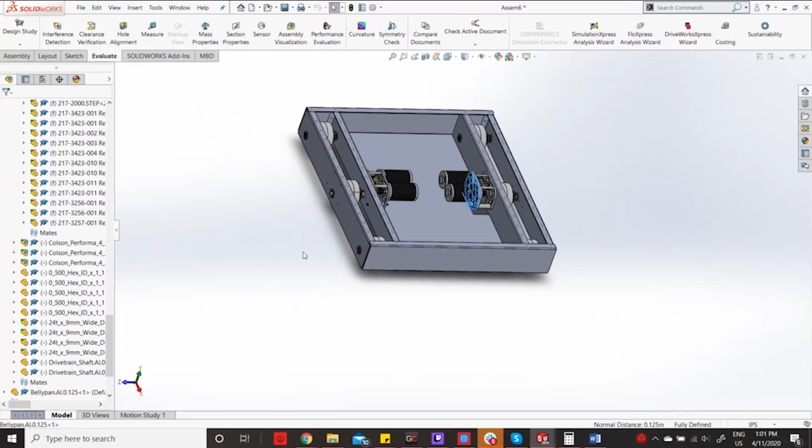Good. Yeah, that's like a basic 2018 drivetrain.

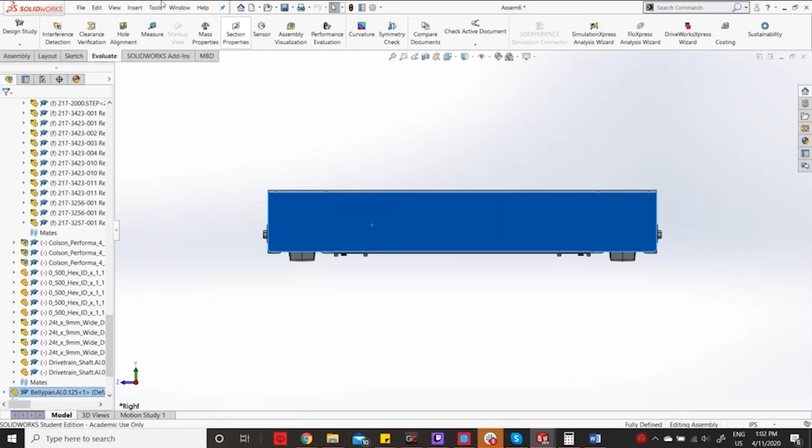So let's just go ahead and pop the holes in. Edit part. File, save as, assembly, drivetrain.

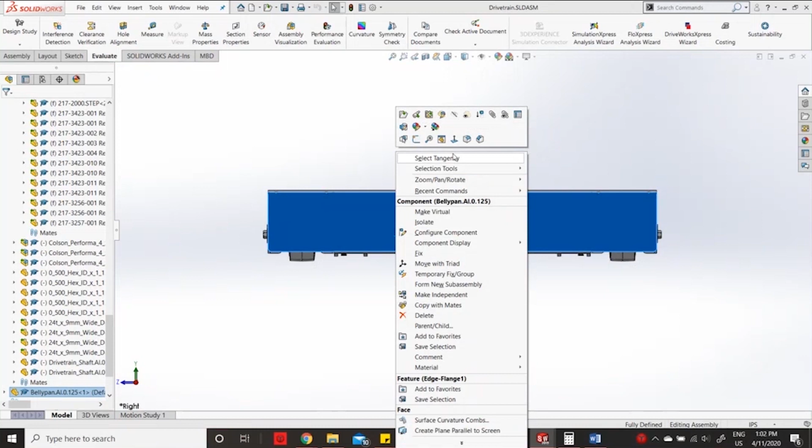So let's see. Part. Okay, so we're gonna want to sketch. This is the fun part of all of this, doing sketches on top of things. Does it not create a sketch? Okay, there we go.

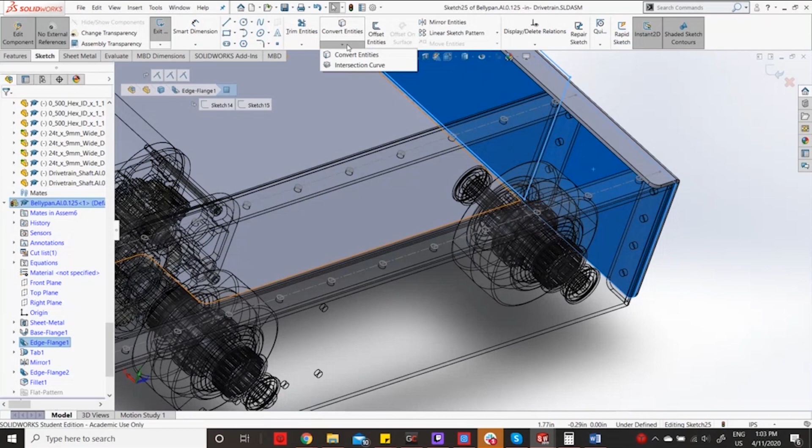Because there's one thing that SolidWorks doesn't have that I really do enjoy from Inventor, which is the ability to project from one element to another.

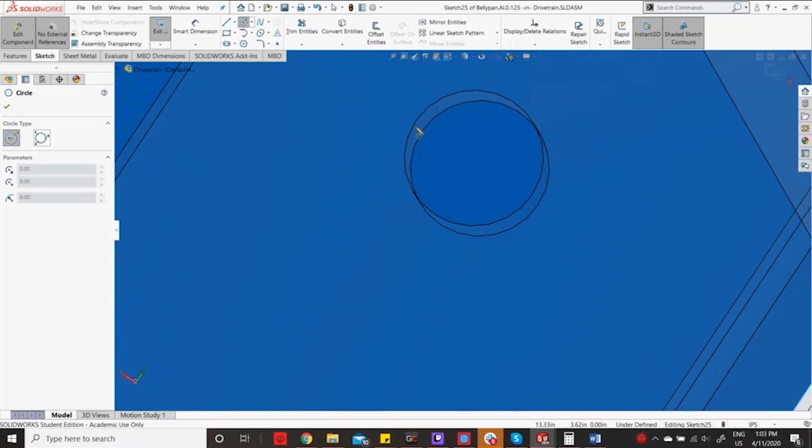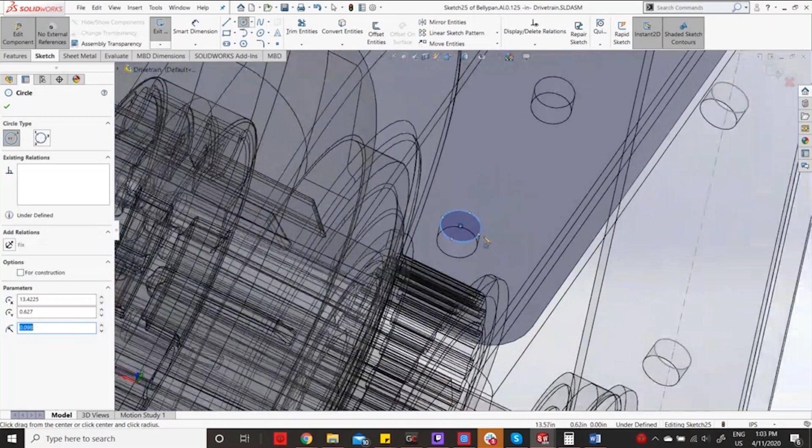So then you're stuck playing this game of trying to find it. So then from that, I can just go out and make all my changes in the belly pan.

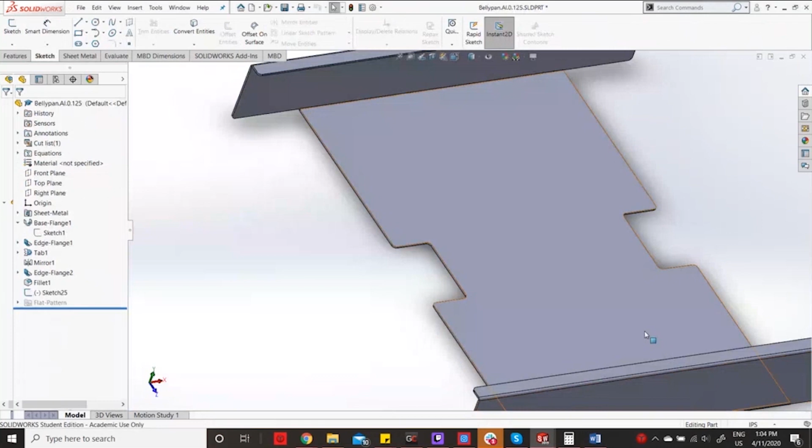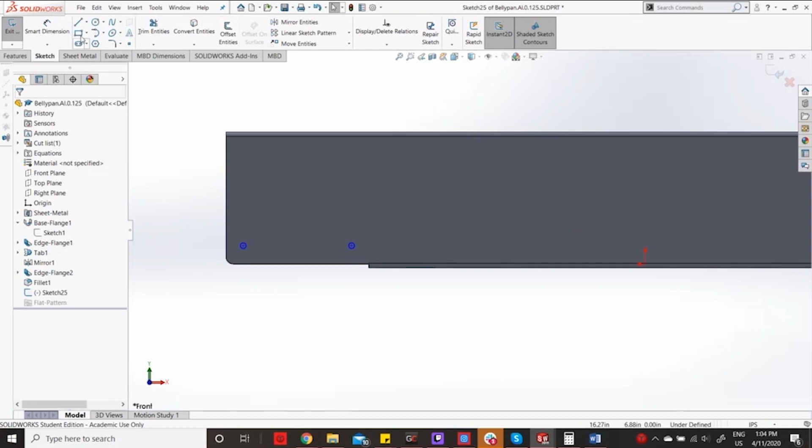So let's go back into the sketch. Okay, and then we know for sure that this is a linear sketch pattern going upwards.

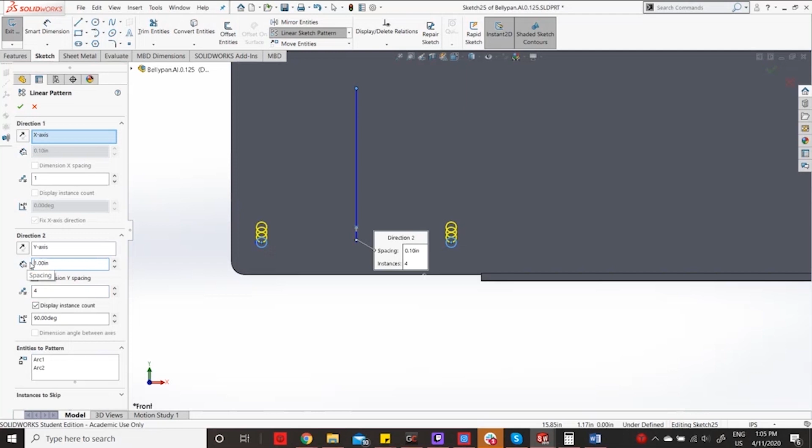We can decrease this to 0, increase 1 here, increase this to 4, increase this to 1 inch, and that should be perfect.

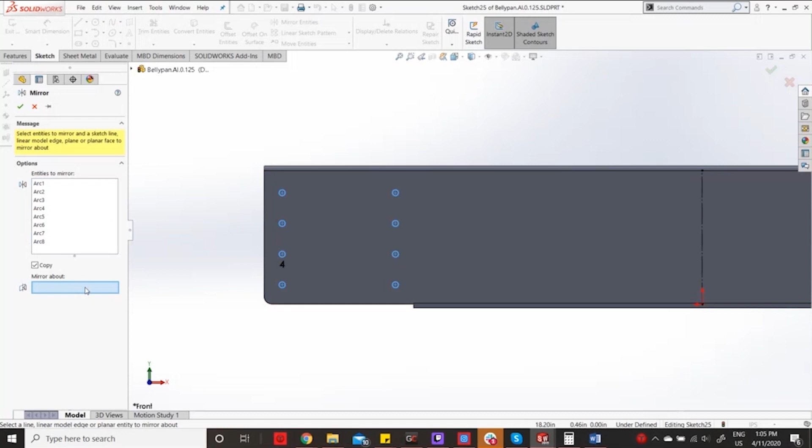And then we should be able to just go ahead and mirror this. Construction geometry, and then mirror entities, mirror those across here, and then exit features, extrude cut.

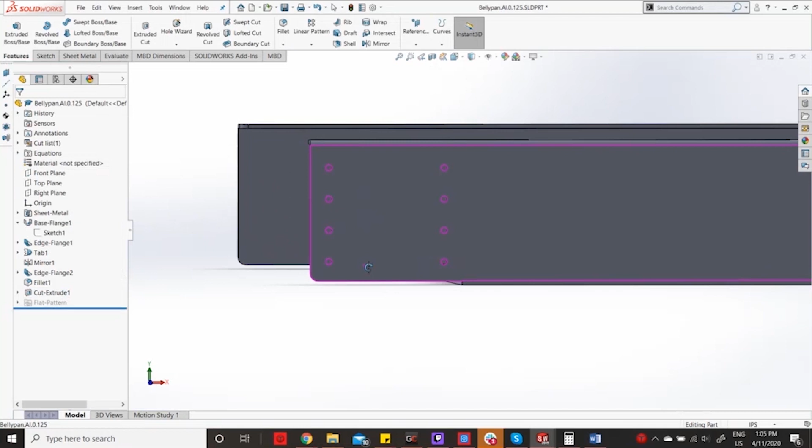Through all. And did it not through all? Did feature through all both. There we go.

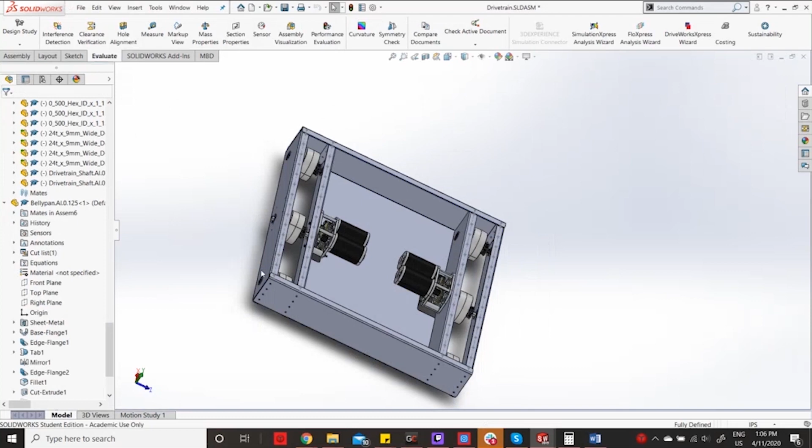Perfect. Okay, and then let's control save that, and let's check if it lines up. Yep, seems to line up. They all line up.

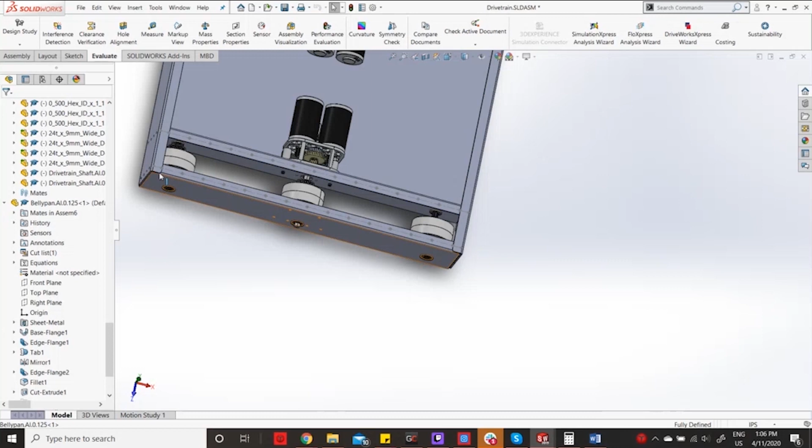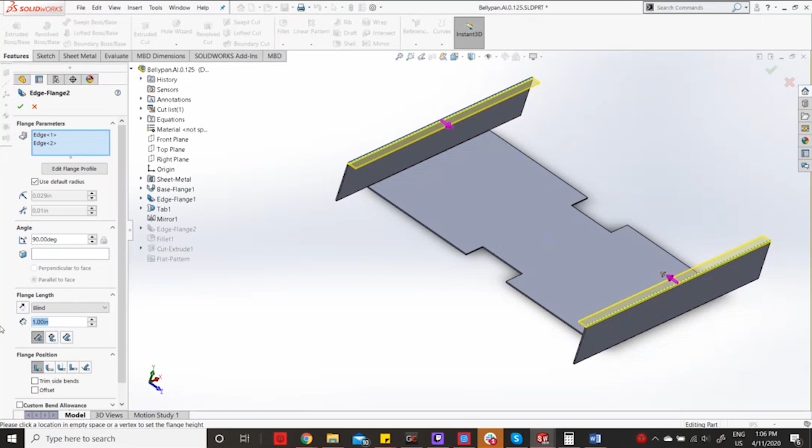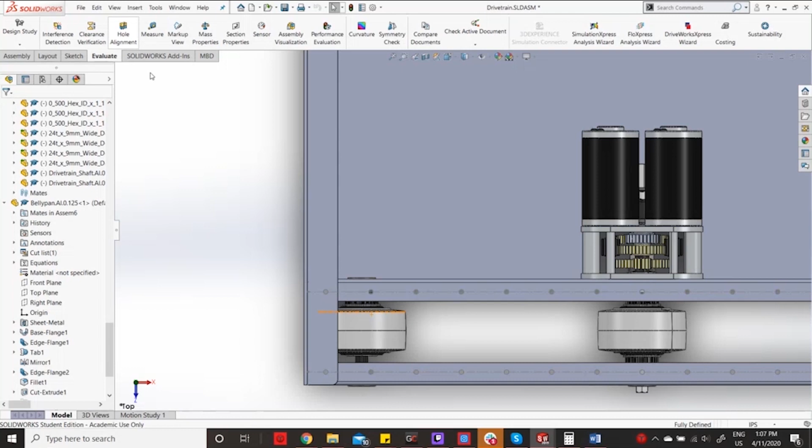Okay, perfect. And then let's throw in a part. Then let's start a sketch here. And then let's make these holes.

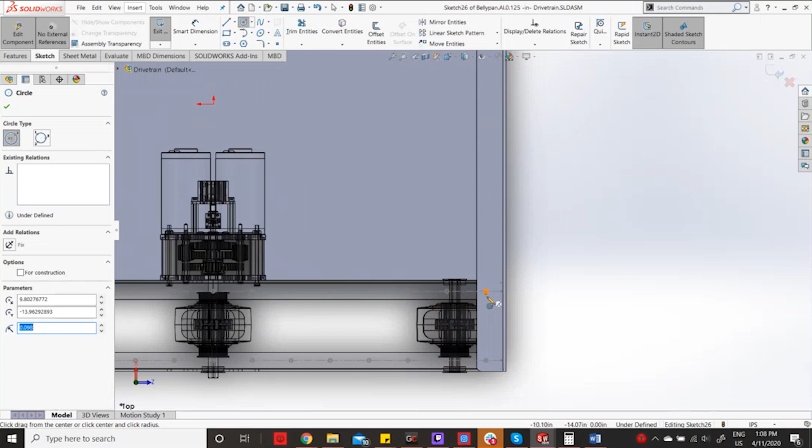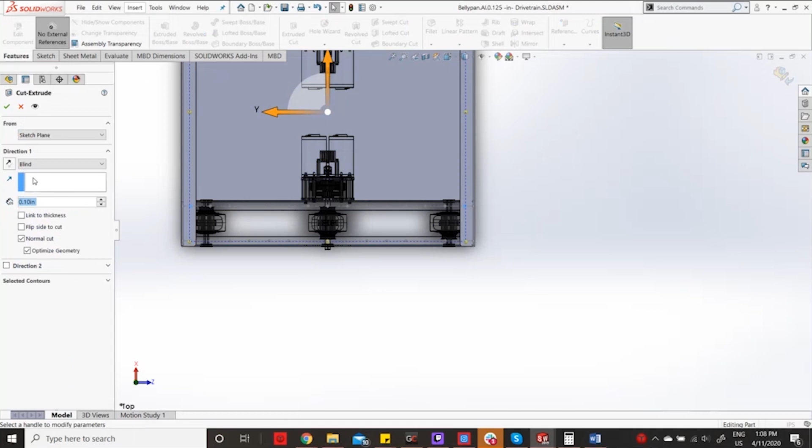Another way I could have done this is I could have just done the bottom two and then linear pattern it all around into the four. Features, extrude cut, through all.

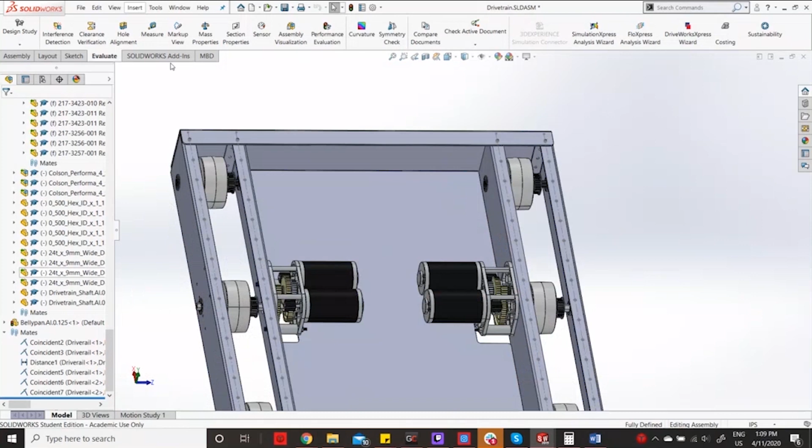Perfect. And then I'm just going to make one last piece and this drivetrain is done. Which is our, how long was the distance between? 4.525. So file, new part.

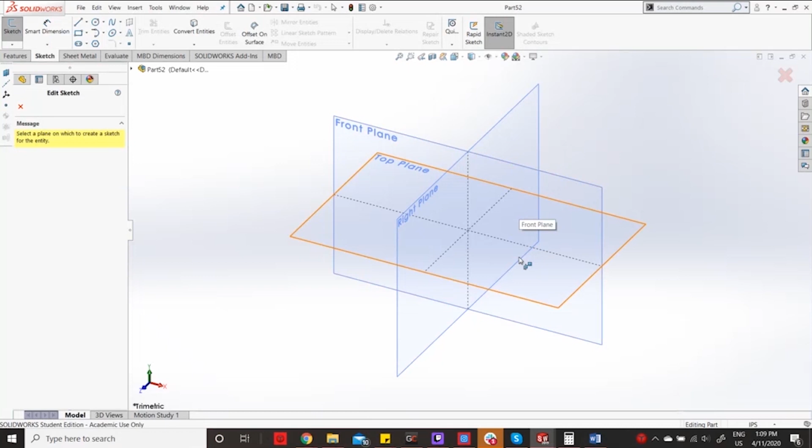A sketch, plane. These are going to be the braces for the drive rail. So let's make them 4.525, and we can make them 3 inches. That looks fine.

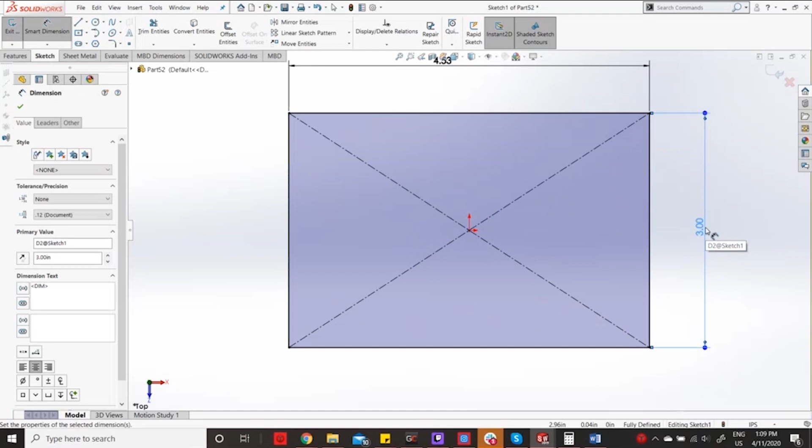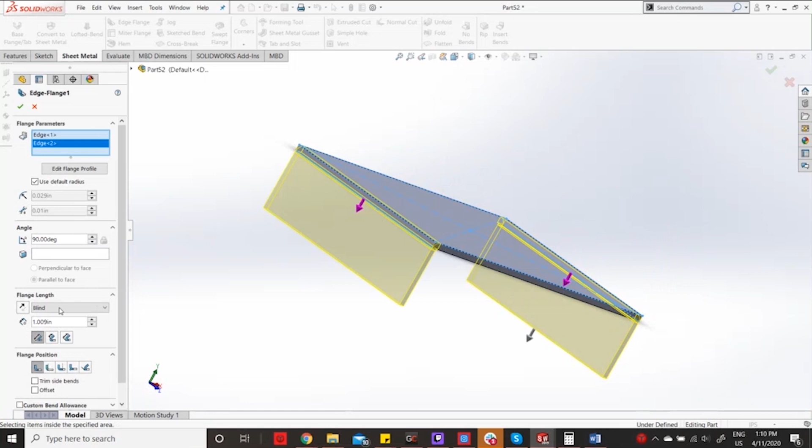Sheet metal. This can be 90 thousandths. This does not need to be overkill. And then edge flange, they can be an inch. And don't forget your flanges - alright, your fillets, I mean.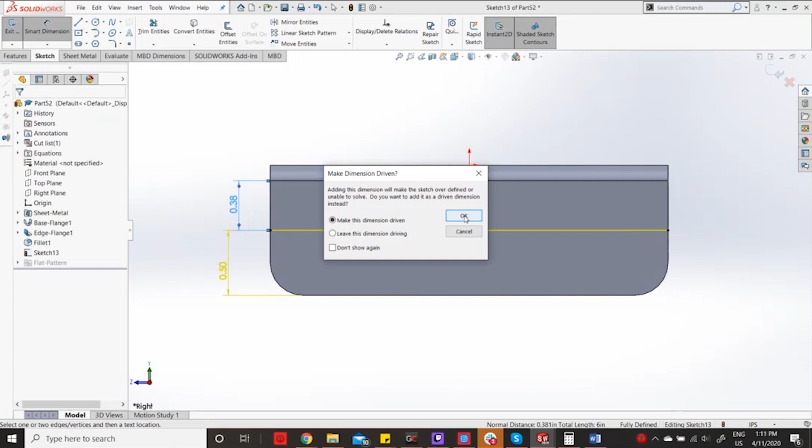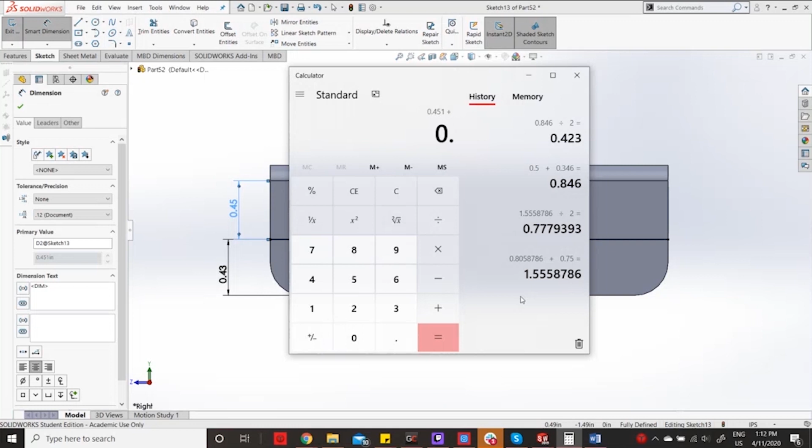0.5. Okay, and that should be the center. It's 0.43, I think it is. 0.451 plus 0.43 divide by 2. Okay. 0.4405.

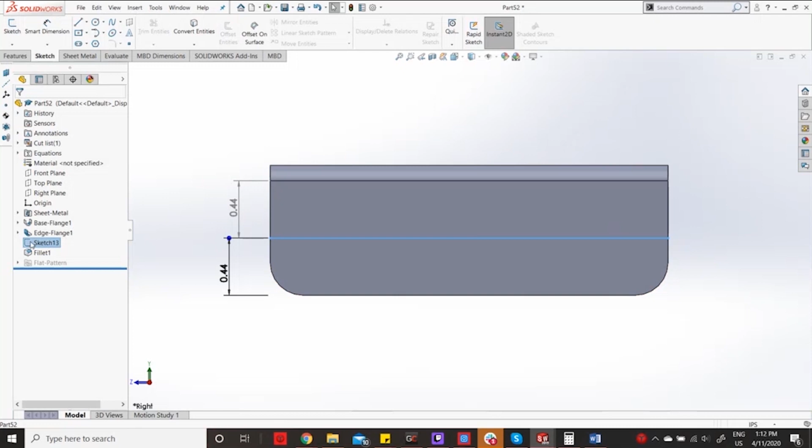You know what? Let's do it this way. Can I actually put this up above here now? Yeah, okay. Let's delete this, let's delete this. Then let's just go ahead and sync this up with the center. Oh, it was in the center.

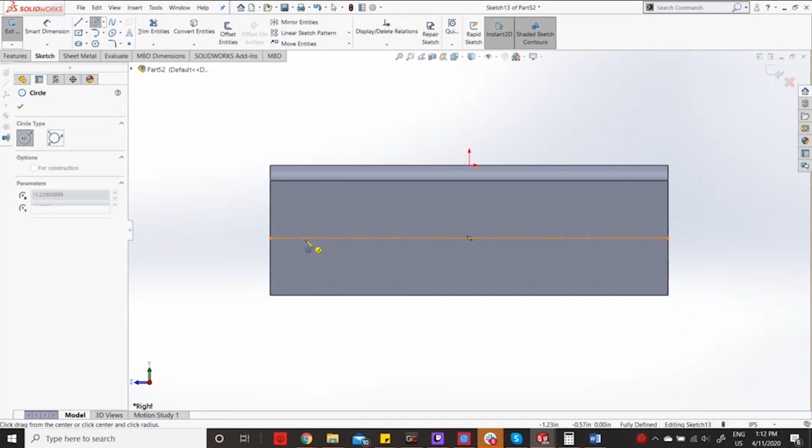Okay. Construction geometry. Throw your rivets in there. Smart dimension it. Yeah. 0.196.

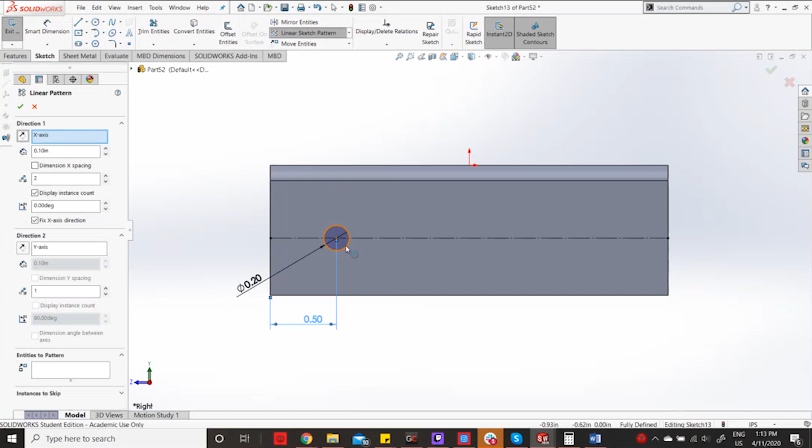Yep. Okay, and then smart dimension it off the wall by half inch. And then linear sketch pattern - let's say every inch, and let's throw 3 of those on there. Perfect. Let me just see what's it from here to here. Oh, perfect. Okay.

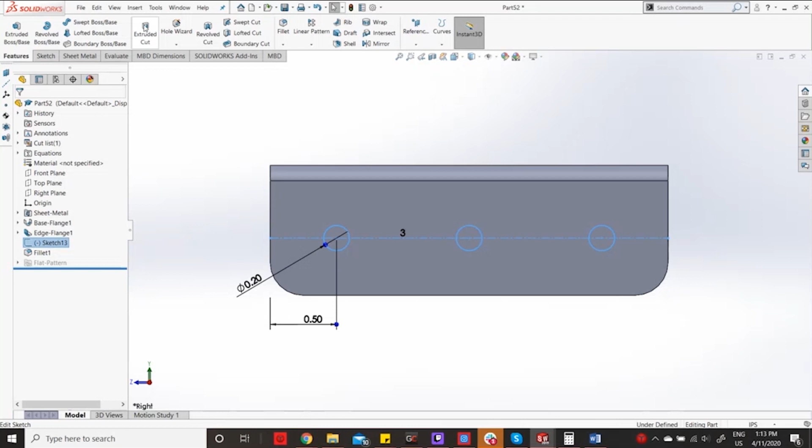So let's go ahead and extrude cut. Extrude cut, through all both. Okay, and then let's control save that.

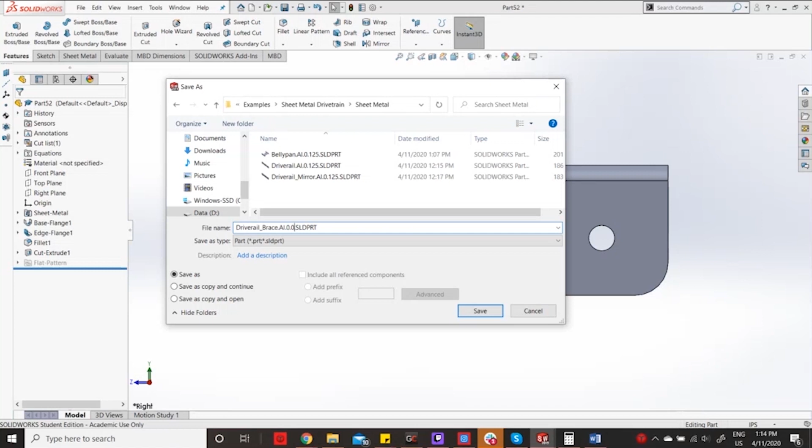Driverail brace. 90 thousandths. And then let's go in and put 4 of those in here.

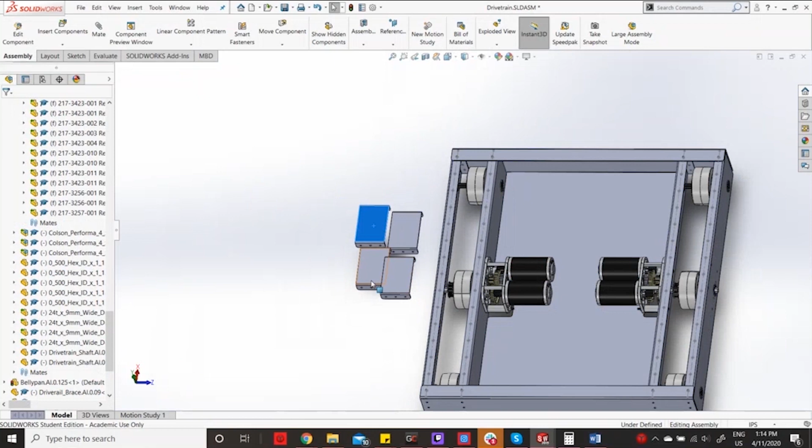Assembly, insert components, driverail brace, 1. Okay, so 1, 2, 3, 4. Actually, we can actually put this inside the drive rails themselves.

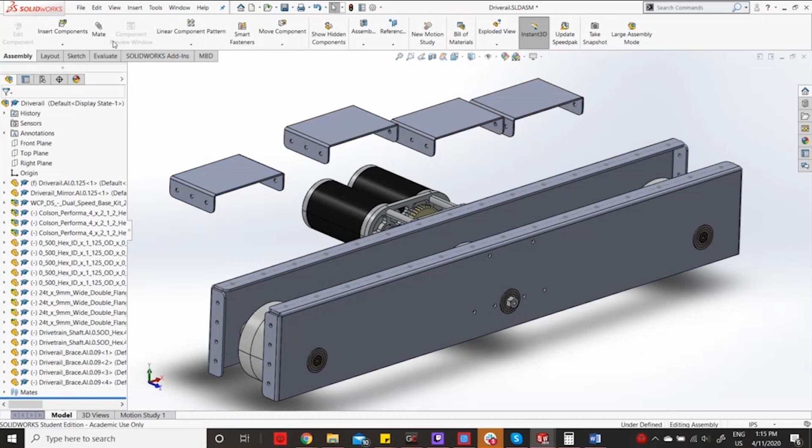So insert component here, just because if we place it in here, we can actually just place 4. If we place it in the drivetrain assembly, we have to place 8. So it's just much quicker to do it this way.

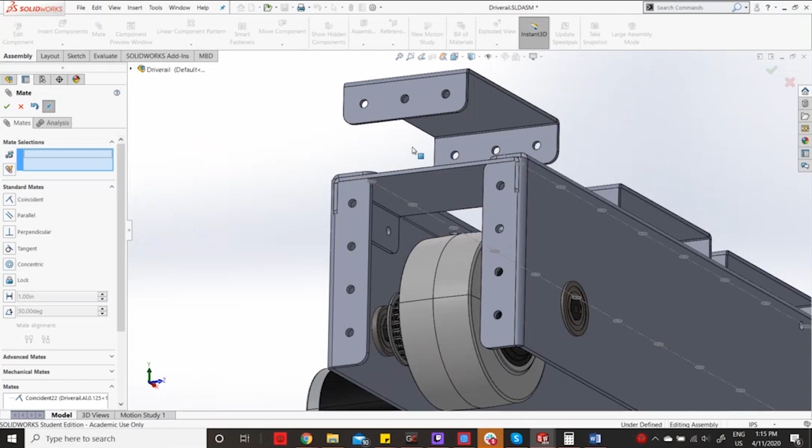Neat. Perfect. And then let's go ahead and mate this at the bottom. Flip.

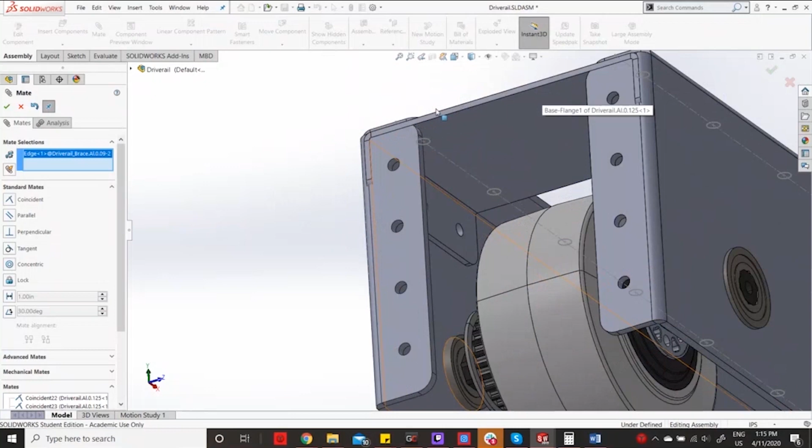Perfect. And then this with this. Perfect. And then we're going to want to put this somewhere like right there. Okay. And then do the same over here.

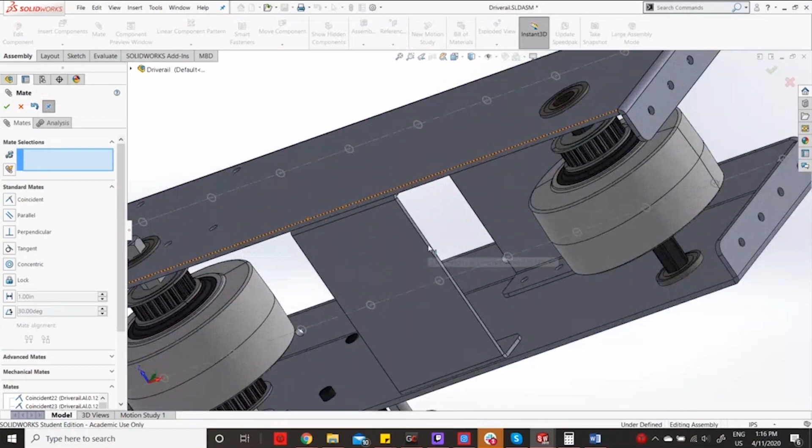Mate this with this. Okay, perfect. And then let's see.

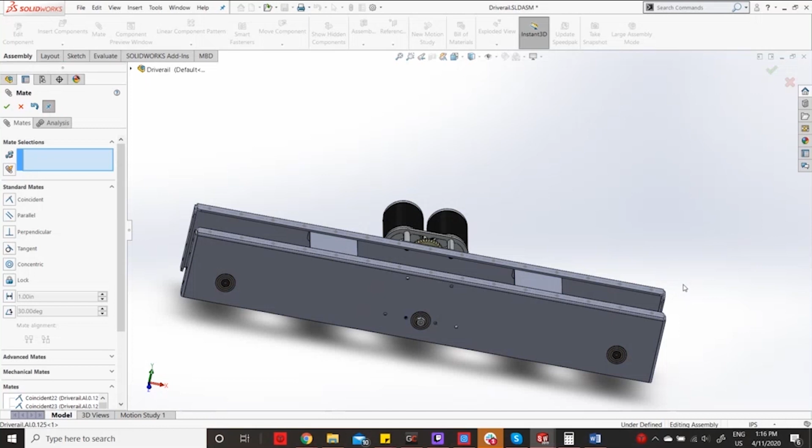Let's try and make these actually even on mates. So let's go ahead and mate this from here to here at a distance of - what does 6 look like? What does 6.5 look like? 7. 6.5.

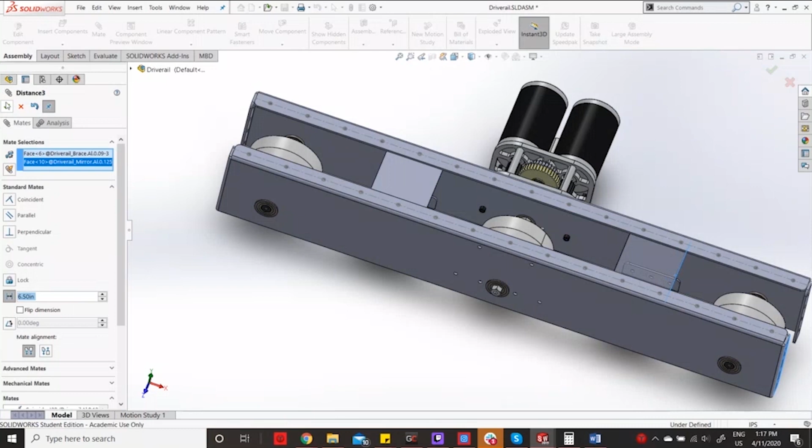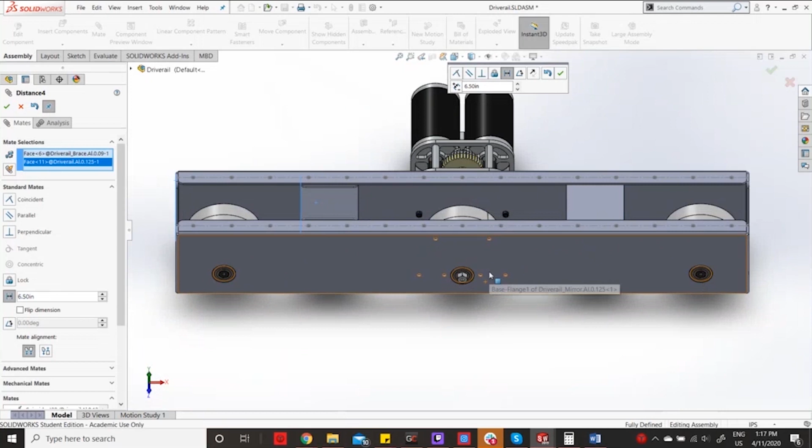Let's go ahead and do the same mate on the other side, hopefully at 6.5 also. Let's look at it from here. I think that's good. And then let's just go ahead and punch these holes out.

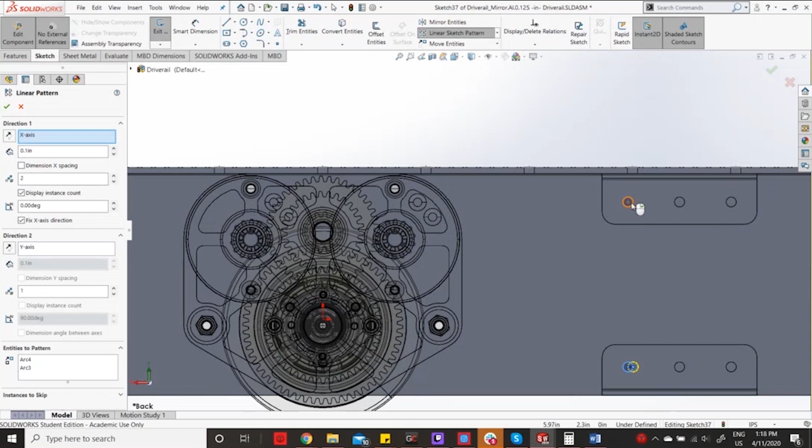And then we should be able to just grab all these. Throw in 3 of them at an inch. Perfect. And those cut straight through.

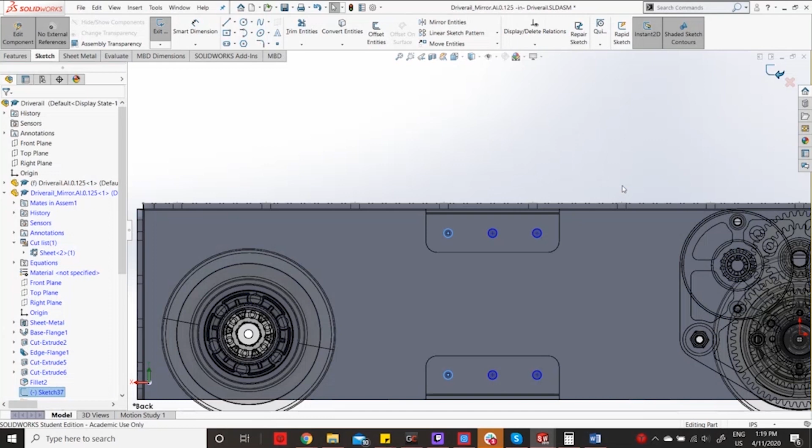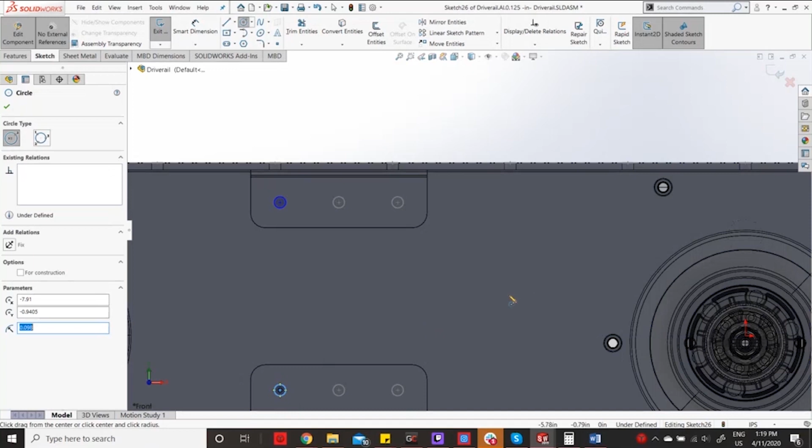And then we got to do the same thing for this one. Edit part. And then - doing it this way is actually much quicker, because instead of having to do 12 little circles, you just end up doing 5 processes.

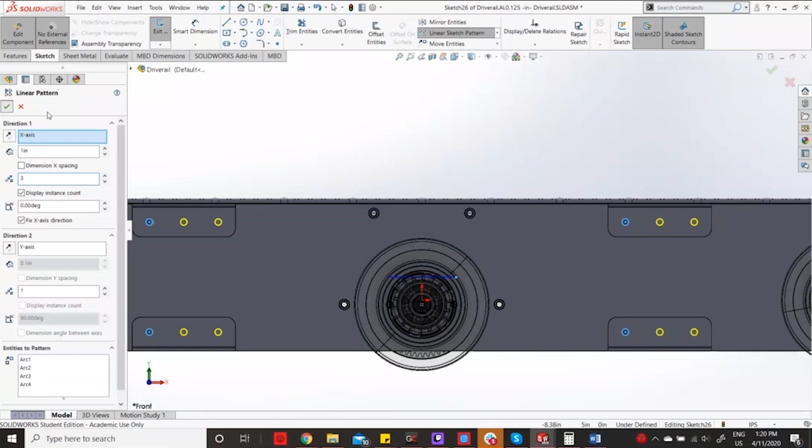Edit part, features, extrude cut, through all, and...

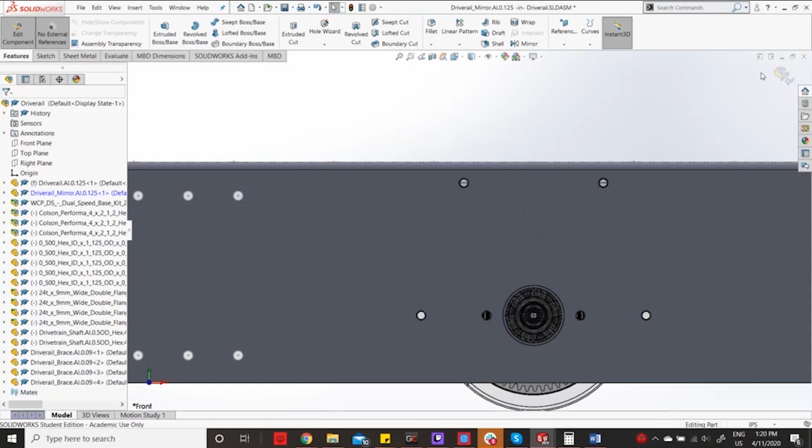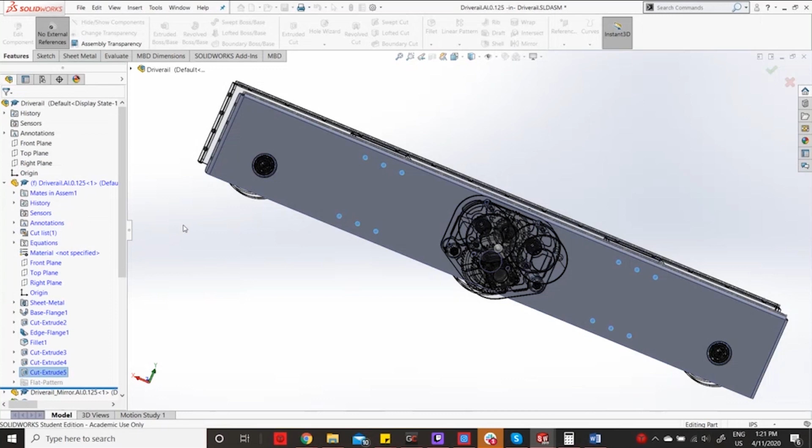Wow, I really forgot to do it on this side too. Control save all. Close this, and then control save this, save all.

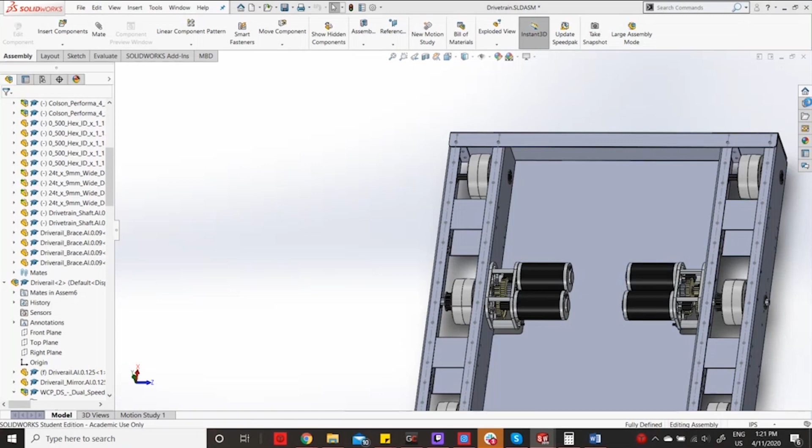And then we can go ahead and close these things. So that's how you make a quick sheet metal drivetrain without a custom gearbox.

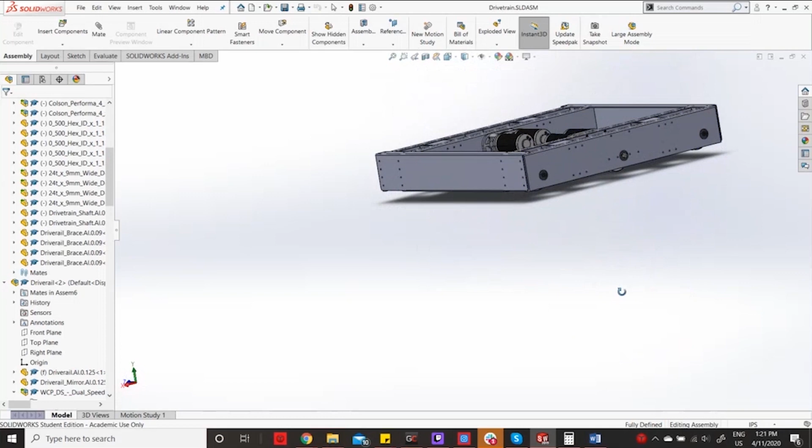Any questions? No. All right.